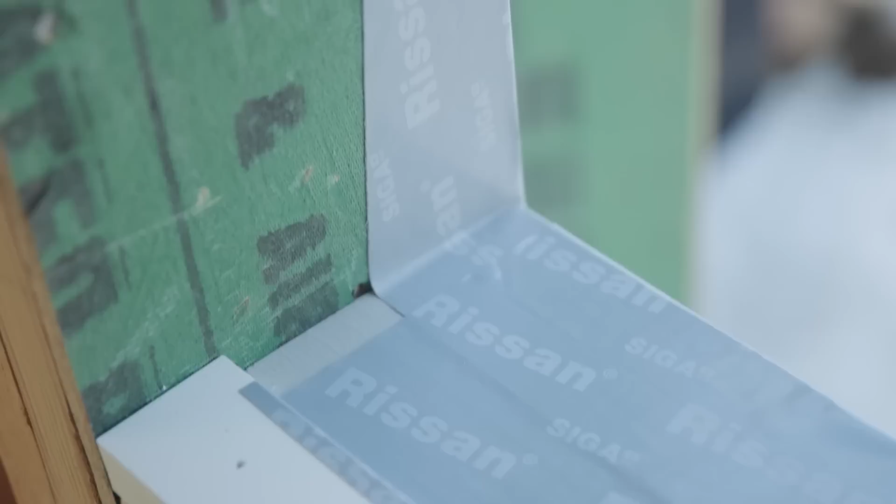Hey, so we're back here at the job site. We finished our tour of that factory. Hopefully you enjoyed that. Those windows went on a pallet, went on a truck, and guess what? You guessed it. The truck is here on site. Our windows are here. We're gonna get this thing pulled up. We're gonna get organized, and we're gonna get those windows offloaded, and we're gonna put in some windows today, so stay tuned.

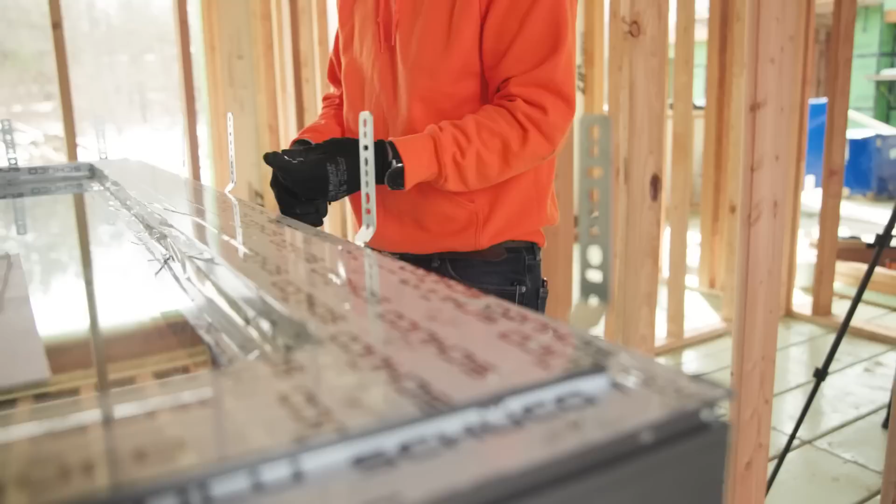Hey, so here we are, part 2 of the window install. And I know we're gonna get to installing windows shortly, but if you remember in part 1, we prepped the window opening. We prepped it using stretch tape and the Zip family of products that are part of the Zip system. But I wanted to show you an alternative here before we get too involved in actually lifting a window up and putting it in place.

So what I hold here is, these are some pre-manufactured flashing corners. They're by our good friends at SIGA, and I'll dry fit this one. You'll see it basically is made to fit right in the corner there. It comes with a dual release tape on both sides, and you can see I had one installed here, but we're going to install this one here right before your very eyes. So yeah, we'll get the architect, get myself in trouble here by

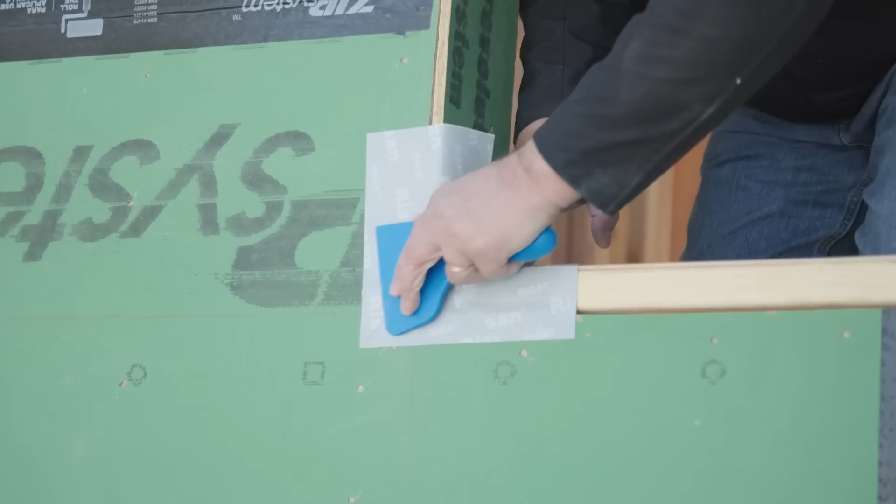trying to play carpenter. So I just got this handy dandy flashing tool, and let's see here. See if you go down the seam and then flash that out, and then I can come back, work out all the kinks there, then fold the inside. Like I said, it's a dual release tape, which means basically 2 parts, so it's not one backing. And like we did the other one, we'll stick the tool in here, and we'll get that corner set, and then work our way out of the corner in both directions.

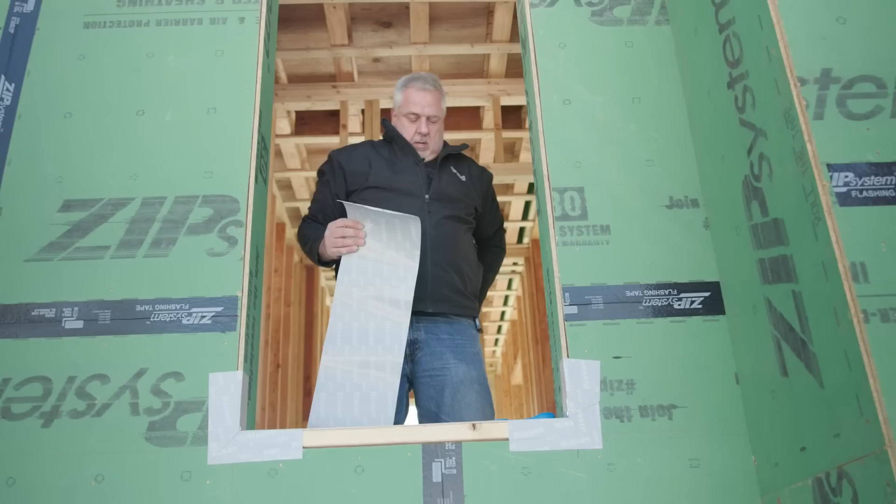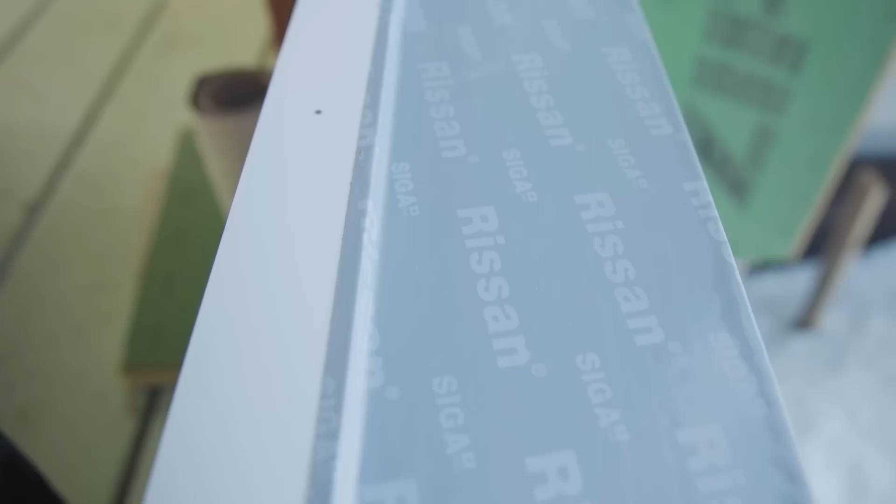All right, so you can see we have both of our corners properly flashed there, and we'll set this middle piece. This is their larger flashing tape, and it also is a dual release, so we'll pull that one section apart, and then the goal here is I want to just bite the top of my back dam, have it come down, go across the slope sill, and basically make an attachment that bridges from my weather resistant barrier there to the top of my back dam. So we will just barely bite that.

The problem with aggressive tapes is they're aggressive. But there we go. So take that, barely bite, handy dandy tool, and just tuck that down inside that back dam. I like this tool because it's got a nice blunt edge, tapered edge there that we can get right inside and then work this stuff out. Yeah, you get a little bit of forgiveness, but not a whole lot. We're spending half the video me pulling the tape off. So we'll take that, fold that down. Remember our goal, connect the back dam down the face of our slope sill.

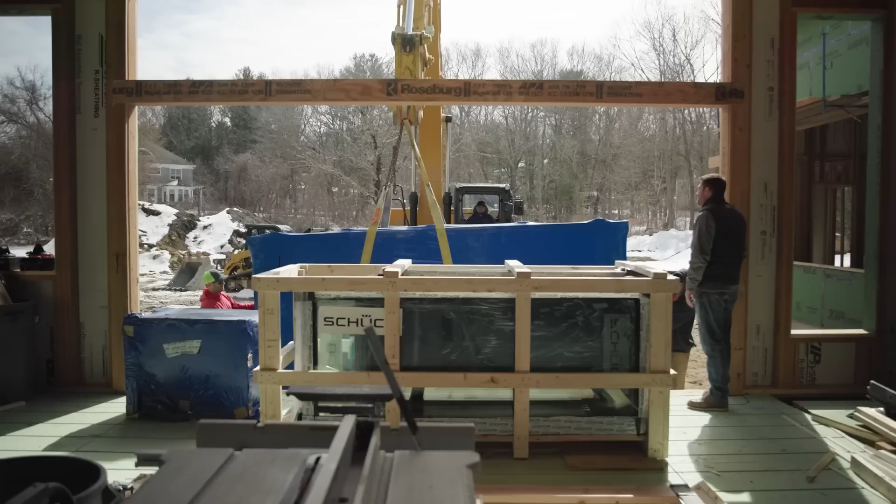Across there. Yeah, and there you have it. A nice flashed corner where we used the SIGA pre-manufactured corners. We drop in our pan flashing there, and of course we'll finish this off by bringing our flashing down the side here, turning it in, and coming over the top of that. So anyways, just an alternative. Let's jump on over, and windows are here. You saw the truck. Let's start installing some windows.

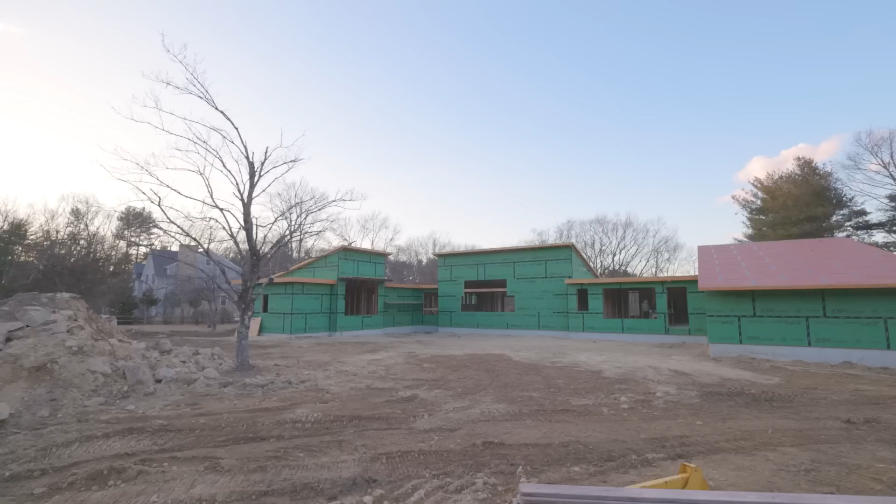It is window install day. Yeah, we're done looking at those rough openings. Schüco truck arrived. You saw that coming in. And here we have our Schüco windows. Not only do we get the windows, but we get a design tech from Schüco. Armando, welcome Armando to Build Show Build Boston here.

And Armando is here to make sure I don't screw up, right? Yeah. That's why they sent you. Make sure Steve doesn't do anything stupid with our windows.

So you can see here, windows come very well packaged. We peeled the plastic off. You can see that they're fully protected when they arrive, and those are still in a protected truck. So they come out, we have the crate, break down the crate. All the windows are individually wrapped. A little bit about the performance of the windows, Armando. So the U value on these windows, it varies, right? Yeah, it varies when you have a bigger system, or whether it's a fixed or operable.

So it varies, the bigger the glass and all that, so it changes, yeah. Yeah, so basically the glass is the better part of the window unit, right? Yeah. And for those of you that aren't familiar with the lingo of windows, we basically have the IGU, which stands for insulated glazing unit. That's the actual glass component of the window.

In a fixed window, we just have the IGU in the frame, but if we have an operable window, the secondary frame that is the carriage of the glass is called the sash. Yep. And we have a lot of tilt-turn windows here, but as you were talking about, Armando, the size of the window matters to the performance. The frame is the worst part of the window, and the glass is the better part of the window.

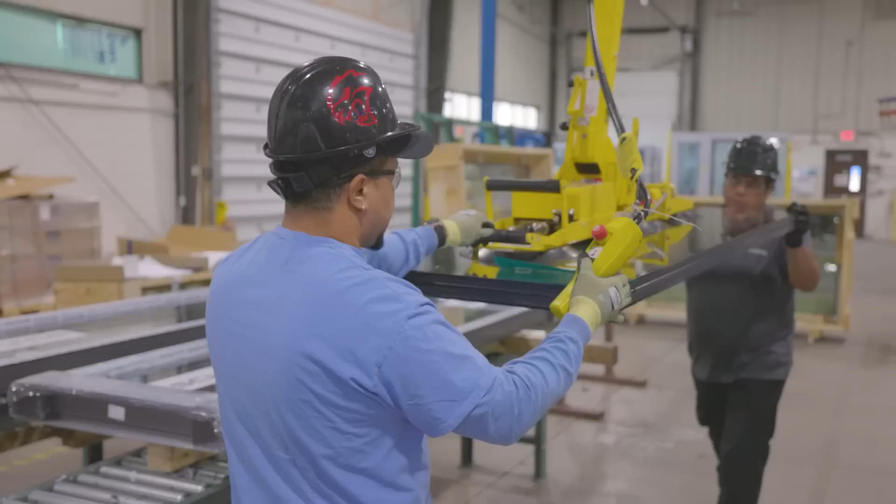I want to say yes and no. You still have a good value coming through your frame. We've done thermal testing on all these units. And these are obviously all thermally broken. Yep, they're thermally broken. Put an aluminum window in. Yep, and this system is an AWS 90. So it's the biggest of its kind, and the thermal value on it is very, very high. Right. So the frame, the glass, it all balances itself out, and that's what we try to do here.

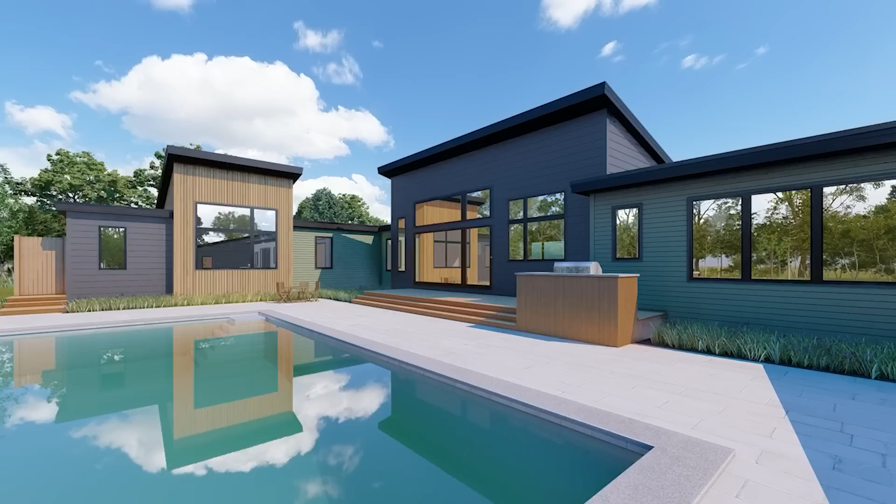Gotcha. And these, for those of you that are taking notes on the U values, these probably range anywhere from 0.13 on our best unit in the house to somewhere around 0.18 maybe on some of the smaller units. Again, through the design work and working with Schüco, I'm trying to maximize the size of some of these windows because the glass is the better portion.

Plus, we're trying to capture the view. So we're taking advantage of building those larger window units to capitalize on the view, the amount of glass, the efficiency of it, and just deliver the best possible project we can to our clients. So, Armando, we should head over there. We're going to break down one of the windows. Armando's going to go through all of the details that he brings from the factory and the design tech side, and we're going to talk about how we prep all these windows and get ready to put it in that rough opening. So let's head over to the table.

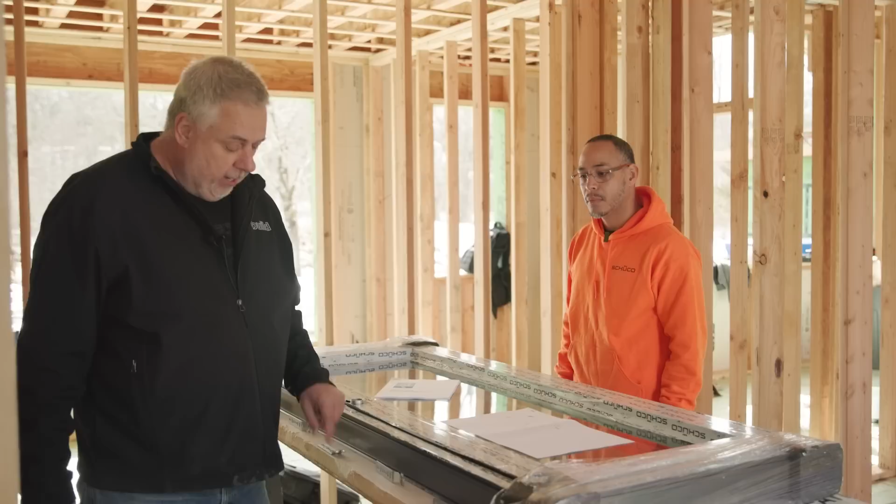We made our way over here. We have a nice little table we made up. Just wanted to point it out, we have a piece of rigid foam that we set the window on. We didn't set it on the sawhorses. You don't know if there's a nail or a staple or anything there. We don't want to put our good aluminum frames up against the substrate there where we're at the risk of scratching it. So we got this up.

First thing to notice there, Armando, is you guys do a hell of a job. Everything is very well protected here. Yes, it is. Right? I mean, you pull it out of the crate and then there's just a whole other level of protection here. Obviously we have the foam on the corners there, top and bottom. We've already verified that, yes, this is in fact the bottom of the window.

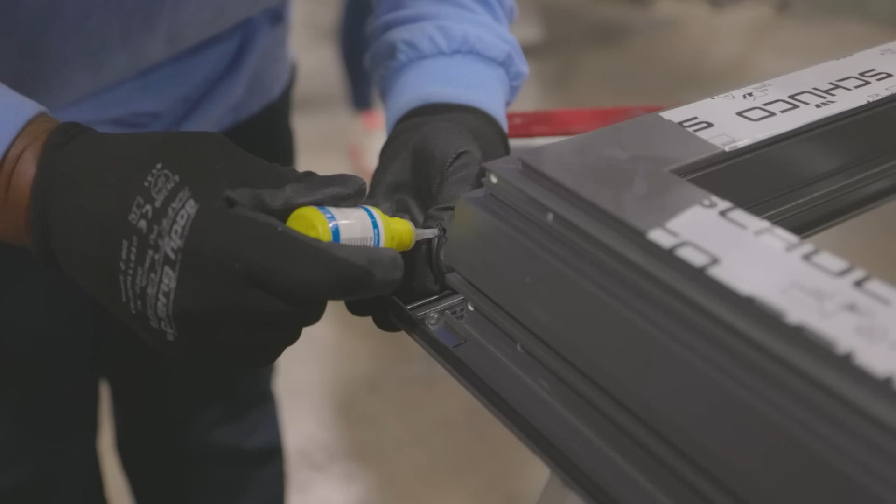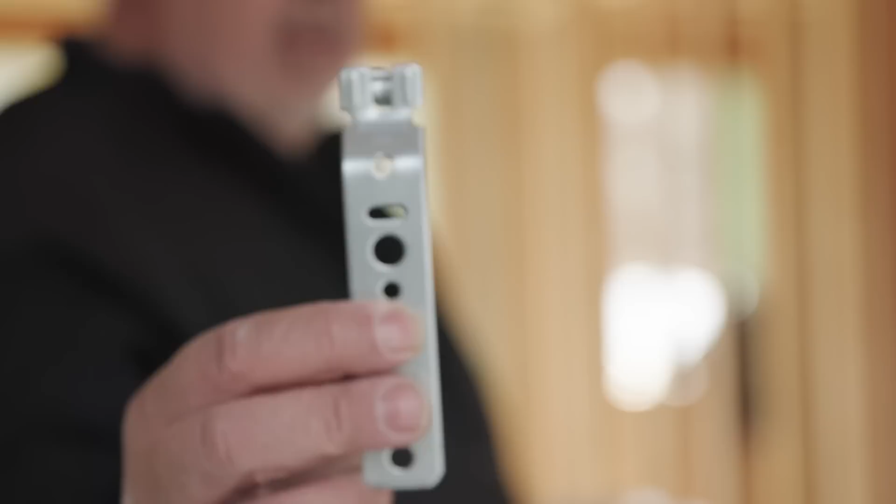So one of the cool things about working with Schüco windows, and you saw it in the factory, is that pretty much all the screws, hardware, everything's proprietary. Well, the same with the clamps. You can see it has the Schüco name stamped right on it, and so it's basically the Schüco stamp of approval. Now, Armando, you pointed out a really significant aspect of these clips. You want to run that by us again?

So the clip is made so that you only rotate it clockwise and not counter. And the reason for that is so that it'll gain grip once it gets into position. So once you have it sitting at an angle 90 from your frame, it'll have the strength. It'll be at its tightest bite. Yep. So let me bring this back over. You can see here that the actual teeth there are angled. So as it gets rotated, it actually draws the clamp in, and it's at its tightest, like Armando said, when it's 90 degrees.

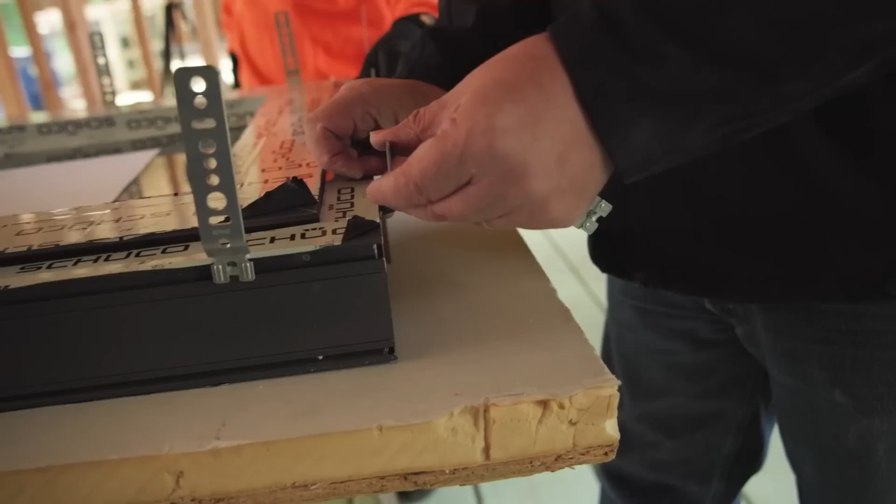Now, installing these, I will say Armando is prepared. He came up. We have a window schematic of the window that we're installing here, and he has all the clamps laid out. I see we called for 6 down the side and then 4 at the top and bottom.

Are there any rules of thumb that we should be concerned with, like how far these come out of the corner or placement? So we actually had a third-party engineering team that came up with a schematic as far as how many strap anchors and how far apart, based on the PSF of certain systems, like if you need it for higher wind loads. So all that came down to it, and I took the schematics from that and I applied it into this, so that way we can actually.

So this third-party engineering company, they didn't engineer it just for us, they engineered it for Schüco. So if I was to say put these windows in Miami, because of the wind load there, or on the coast even here, these clips, instead of 6 down this side, it might in fact be 7 or 8 of them. Yep. So that we're getting a stronger bite there, right? Yeah. And I know you told me that typically the first one goes in about 4 inches on each side of the corner.

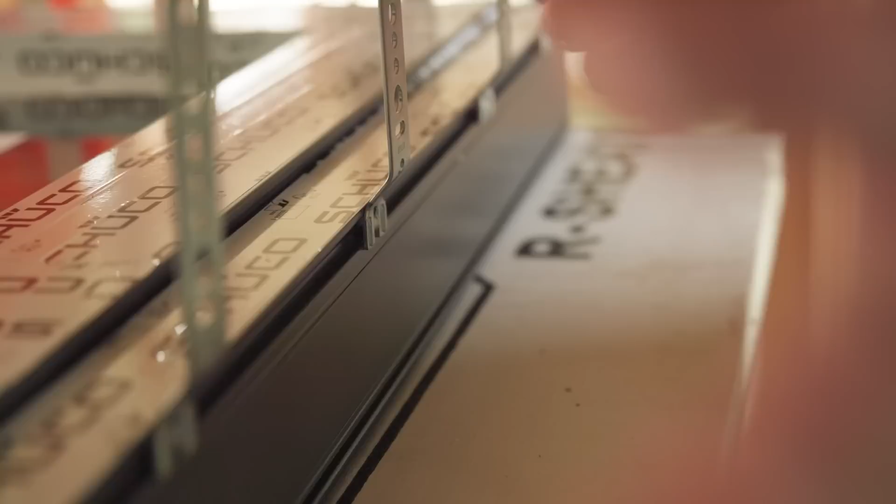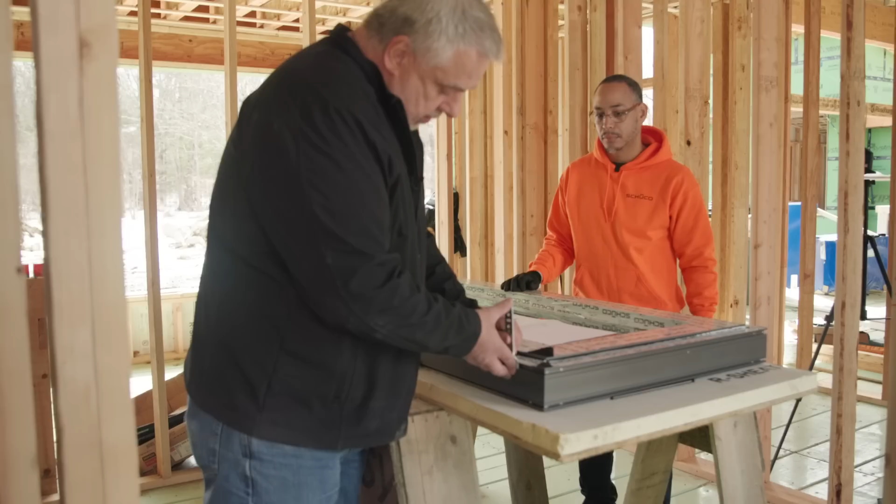Yep. And again, clockwise, so here we go. First one goes in, we rotate it, and you can feel that get drawn in, and that's it, right? Yeah, I mean, that's pretty much it. Not a whole lot of magic.

One of the beauties also, for those of you that don't have Armando showing up on your job site, we have an extensive installation guide here by Schüco that goes step by step for every aspect of the installation of these windows. So we'll wrap up, we'll get the rest of these clamps ready, we'll get the window prepped, and in the rough opening she goes.

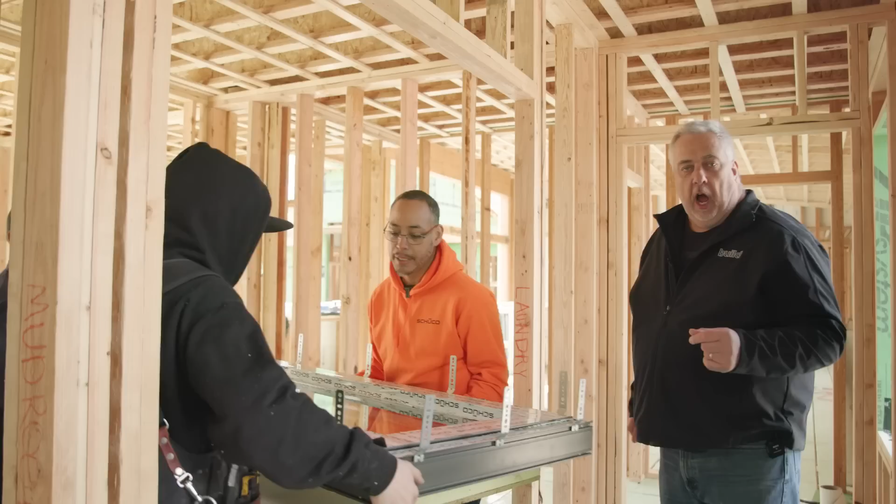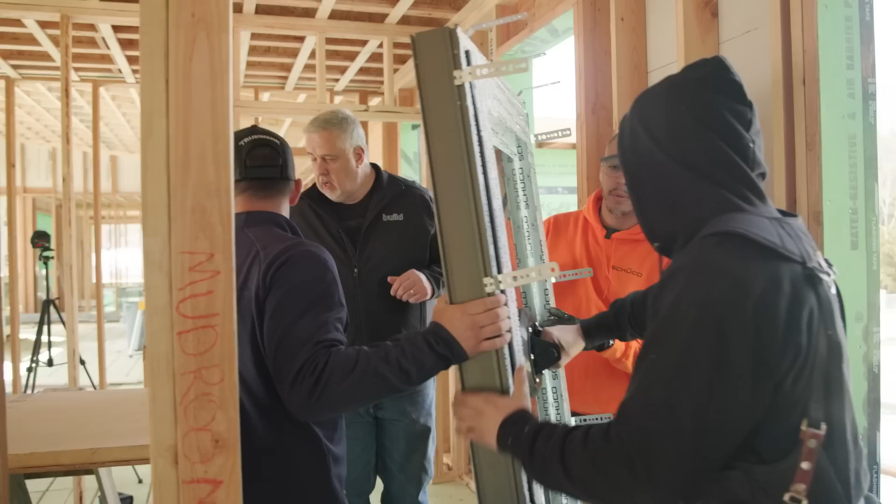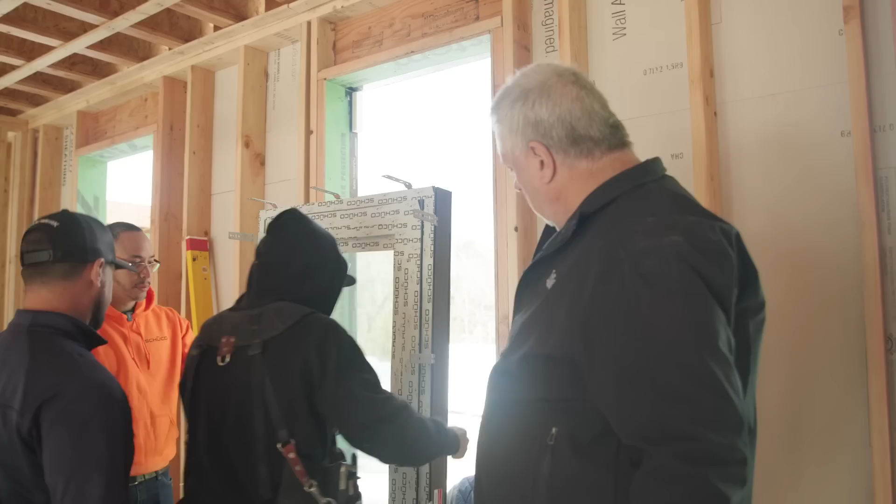All right, so we got the window clips all set. We're standing the window up. We're gonna throw it in the opening. Notice in the opening that we have a series of blocks that have been installed. Let's see if I can sneak through here. Excuse me, buddy. But you can see the block up at the top there. We have a mirrored one block here, and then we have 2 at the bottom. 2 things are happening with those blocks.

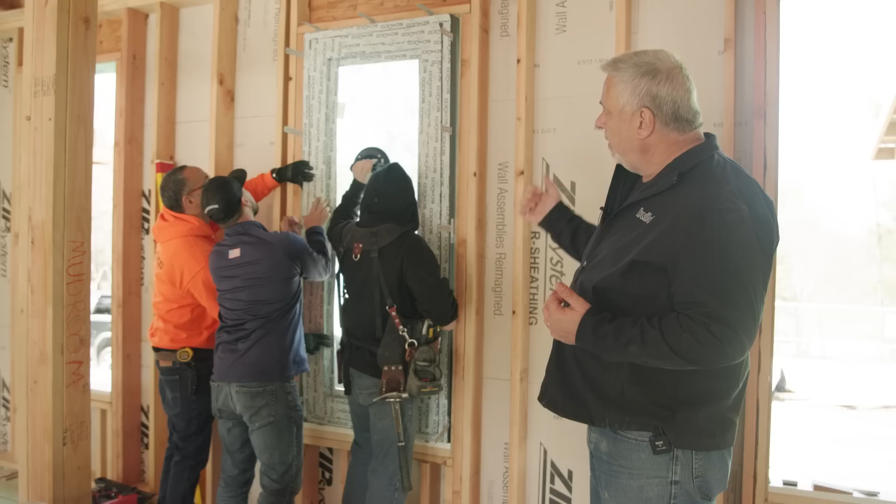One, they've been plumbed up by the carpenter to make sure that if we put the window up against them, the window is then plumbed. We'll still check the inside with a level. But the other thing is, windows are not the cheapest part of the house, and the last thing you want to do is lift it, put it in the opening, go to tilt it in, and the window falls out of the opening and ends up down on the ground. So those little stopping blocks not only preset the displacement of the window in the opening, but they also help keep the window from falling out of the opening. So let's get this window in, and then we'll show you the attachment sequence.

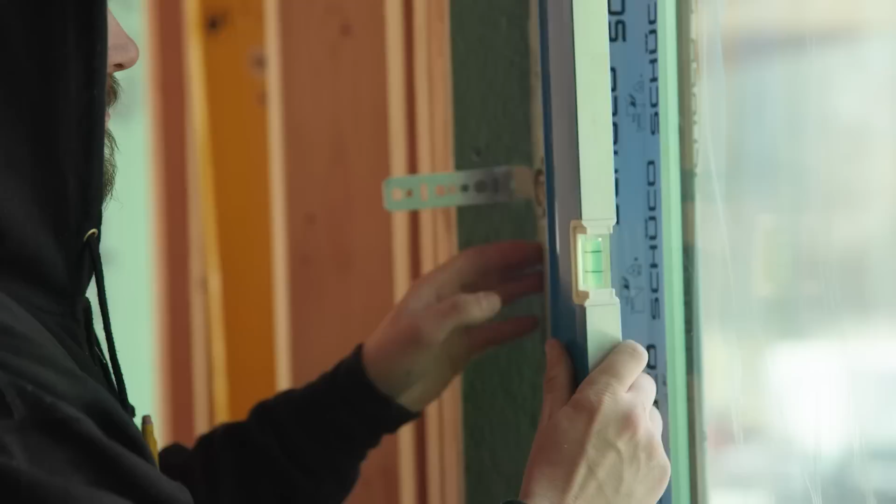All right, so you can see we got the window in. Christian's got it all screwed off. All of our clamps here, you can see they're screwed off. Now they're standing proud of the frame. Sometimes you could just bend those over with a hammer, but I like to have the guys come and grind those off, maybe about an 1/8 of an inch inside of the rough opening there.

For those of you not familiar with Euro tilt-turn windows, we have our tilt-turn window here. Obviously the handle is in the down position, that's the lock position. If I turn it 90 degrees, you can see that is the turn version of the tilt-turn window. That gives us the full ability to clean the window. Consequently, you don't open the window to vent like this. It is merely just to clean the window. If you're venting the space, then you rotate it another 90 degrees and you pull the window, and you can see it falls in about 7 inches and it becomes fully venting.

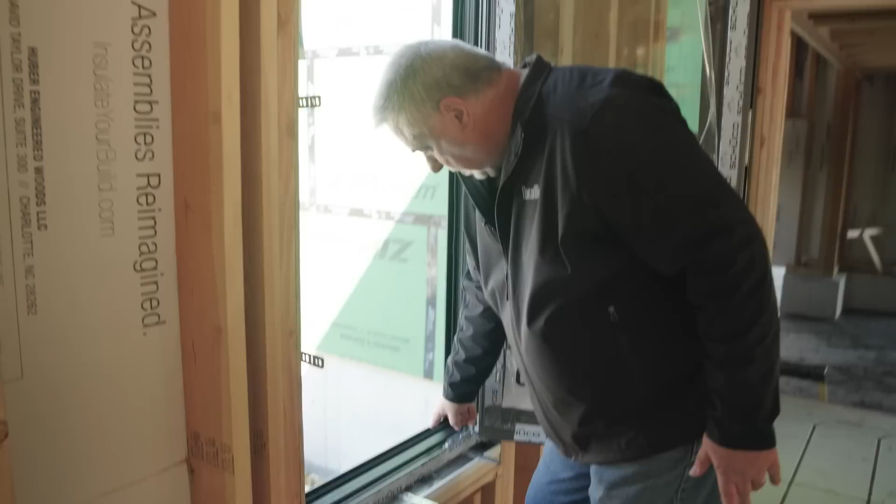The other beauty is that water now is a shedding device into the frame. And when we were out there, we talked about it. It drops down into the frame, and you can see there's some weep holes down there inside that allow the water to go out. So not only are we having a water-managed system of the window in the rough opening, but the window unit itself is water managed. So, all right, the window's in, it's screwed off, we'll get those ground off. Now how do we finish the window? Well, let's talk about that for a second.

Window's in, we just went over the operation of the window. You can see our 1/2 inch space there. That is the unit dimension versus the rough opening. Unit dimension plus 1 inch, we went over that, and that gives us the rough opening.

Now, I talked about it earlier. The zip liner in the rough opening is to bring our weather resistive barrier around the corner. Now, whether you believe it or not, the window is a weather resistive barrier also. Because we cut a hole in there, we replace the sheathing that we cut out with the window. So it's now doing the job of the weather resistive barrier that would have been there if we had not chosen to put a window there. So now we have to make a connection from the window and bridge it to that liner or weather resistive barrier that we fold on the inside.

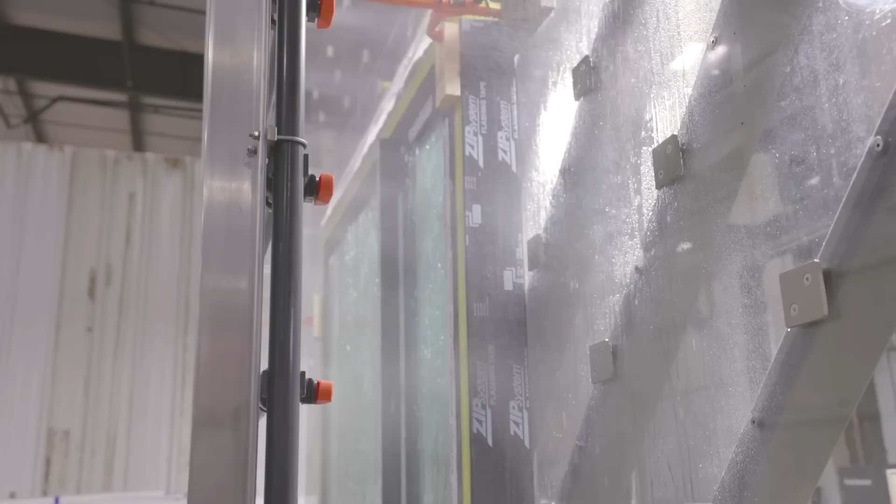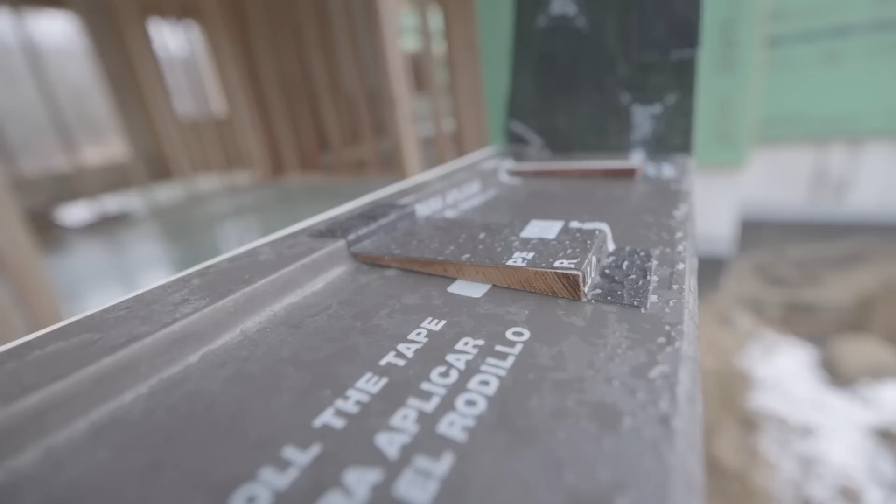Now, 2 things that we need to be concerned of. Number 1 is water. We need to solve for a water managed system. We went through the whole deal here. You saw the video where we built the back dam, prepped the window, have it on blocks, window sitting up on top of those blocks. Water can get out. We want to make sure no water has the ability to get in along the sides and the head of the window, but also air tightness.

Now this house here, we're shooting for what I call passive house inspired. So we're not seeking certification, but we're seeking all the parameters of passive house. So we'd love to get this house into that kind of 0.5 or less air changes per hour at the 50 Pascal mark. So air tightness is very important to us.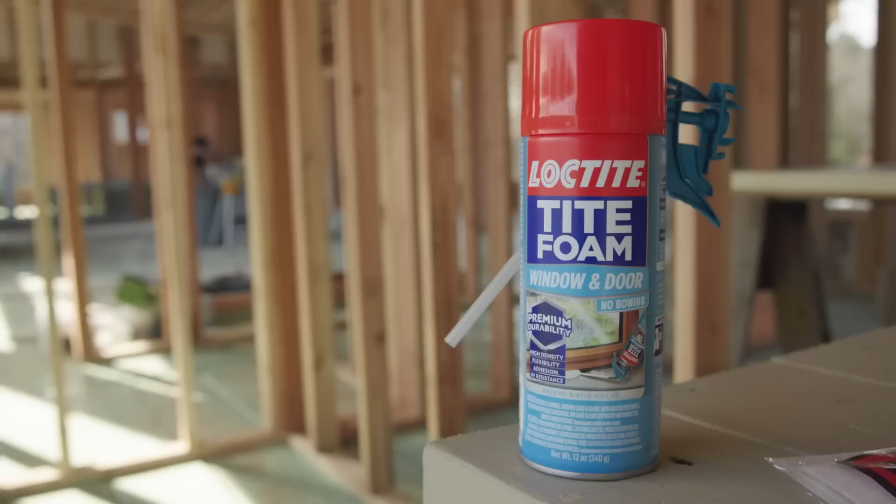So we have a couple things happening at the window here. We have the 1/2 inch space here, but notice up at the top, we're relatively tight and we're relatively tight down here. There's a couple ways of doing this that I favor, and I'm pretty much good with interchanging these 2 different means. The very first and simple one is to just get some minimal expanding foam, and why I call for minimal expanding, it says no bowing basically, is we don't want the foam to apply any pressure and try and move that jamb.

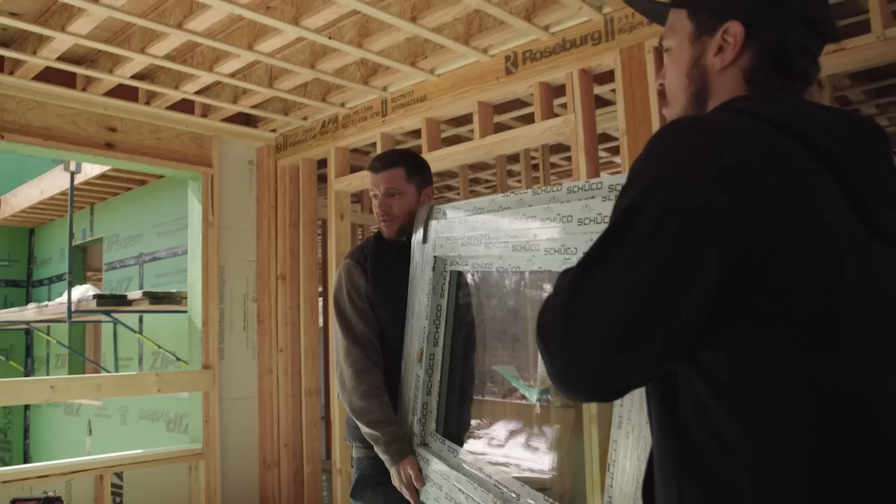Now, for smaller double hung, double glazed windows, the frames there are a little more fragile than the European frames. These are about 3.5 inches square. They're very robust, triple glazed IGU. You're not really going to move those if we use something that wasn't minimal expanding, but I still like to do it. Basically we would just take that foam and spray it along the inside edge here and make the connection from the weather resistant barrier liner to the window itself on the inside. Given that the window's 3.5 inches, we're probably looking at this inside 1/2 inch being filled up with this stuff. The remaining 3 inches there are basically just open to the air on the outside for now.

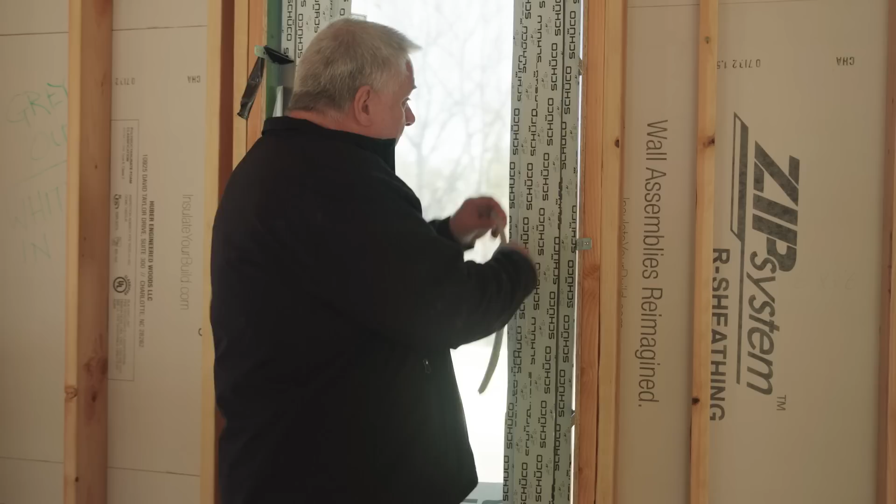The second mode of operation here that I would approve of is to use a backer rod, and our good friends at Sashco using some Big Stretch, which they call Big Stretch because it's made for big cracks. But for that, we would basically just simply tuck in that backer rod. And you can see, it fits in there nice and neat. Now, that's a 1/2 inch hole. We're using a 3/4 inch backer rod so that it fits in there nice and snug.

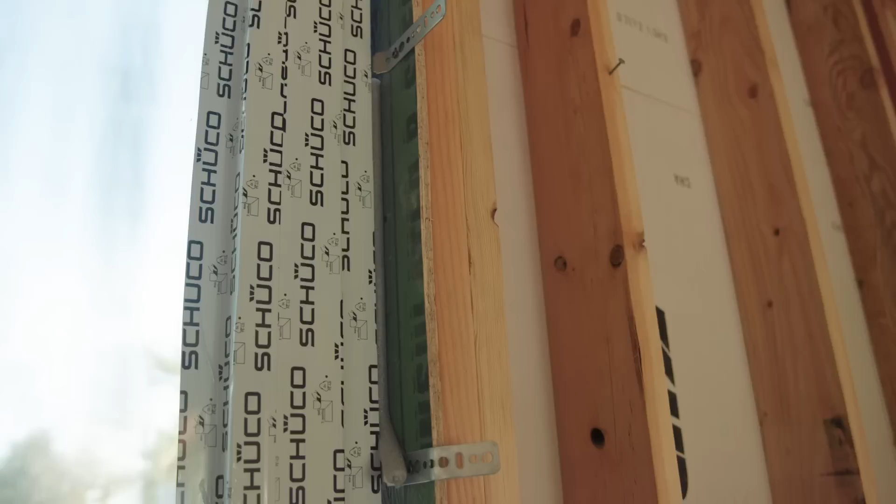And then we would take that caulk and caulk that joint. Now, the beauty of the caulking is when we turn the corner, that joint is small enough where we can get away with just using the sealant there and not have to introduce any backer rod. As a rule of thumb, if this starts getting past maybe about 1/4 inch, the sealant doesn't want to stand alone. So you want to get that backer rod in there to reinforce it. Now, those are the two ways to seal the side or jamb of the window to that weather resistive liner.

There's still one last step. The very last step, we turn to our friends at SIGA. So we have 2 different rolls of tape here, 2 different sizes on those rolls. On the inside, we use their Fentrim IS-20 tape, and the IS-20 tape is an impermeable tape. We don't want any moisture that gets in there to have the ability to dry this way.

We want to force the drying to go to the outside. Now, the beauty of Siga tapes is they're dual release. So there's actually a flange here that you attach to the window, and then you can see that it comes off. So it's already pre-folded and all set up. I took the minute here to pre-install a piece so you can see it here.

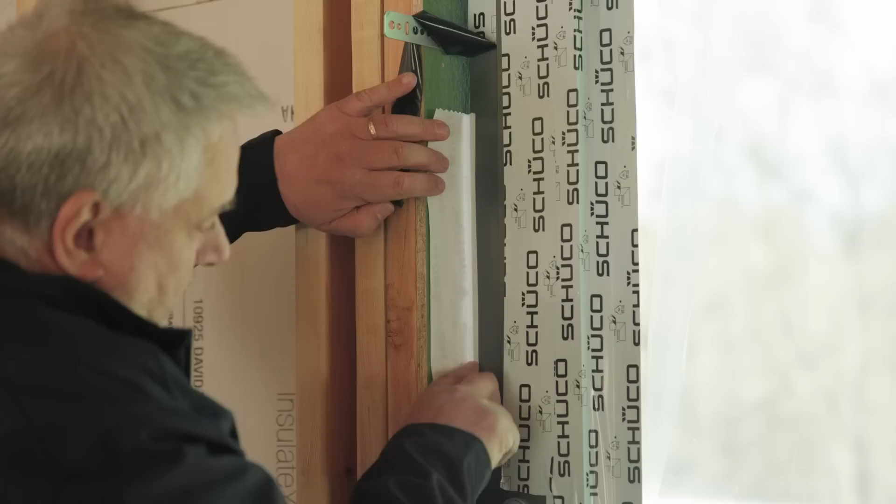The flange, we just want to bite the window about, you know, maybe a little over an eighth, 3/16 or so, and then basically fold it up, and we would just take off that piece and then simply attach it to the inside. Now, from an air tightness perspective, we would do this across the sill, up the jambs, and across the head so that all 4 sides would have that continuous air barrier there.

Now, one of Siga's logos is their job to seal up the world, right? So they're specialists in air barrier connectivity and air barrier technology with their Siga Majrex and their Rissan tape. But that 2-part release and having it pre-folded, you can see that it's already set up for that 1/2 inch dimension damn near perfectly there. So we would run that around.

Now we have our fully water managed system inside. We have our belt of either spray foam, the expanding foam, and or the backer rod with caulking, or just caulking if the joint is too tight. And then we'll finish off the whole system by enclosing it in this IS-20 Fentrim tape on the inside.

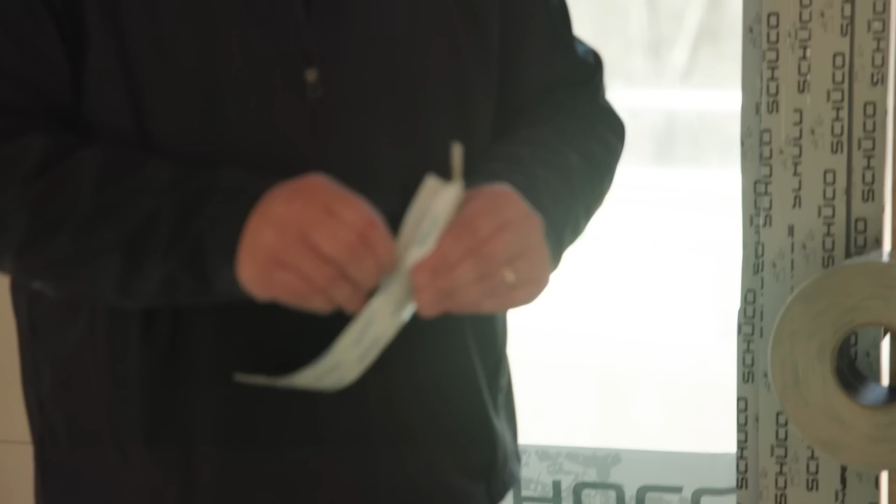As we move to the outside, we would then move to their other Fentrim tape. This is their 230. This one's gray, not white. And it is also a similar kind of tape. So it has that one section where it can be attached to the window, and you can see this is also dual release on the sides. So just like the inside, we would run that up the jambs and across the head. Notice that I made no mention of putting this tape down at the bottom.

So on the outside, it helps to create somewhat of a tortured path, but it's really not an air barrier for me out there. Although, if you wanted to do this as a barrier system, this is a permeable tape, so we could very well put it on and do all 4 sides. I choose not to. I like to have the water managed system. I like to manage the air on the inside of the window.

I place this down the jamb of the window all the way to the bottom of the window frame and across the top, so the top piece obviously overlapping it. So think of it as flashing. So the only place that air could get in is through the bottom of the window at the bottom of the sill. But with all of the action we're taking on the inside, I'm confident that we're going to get to our air tightness number anyway. So I'm not really worried about that. But that's how we finish off the install of the windows there.

Hopefully that answers all of your questions. We got these beautiful windows in. That's one of about, I think, 38 windows here. We got some monsters going in, so next time we come out here, we're going to have windows in and we're going to be closed in. So until next time.

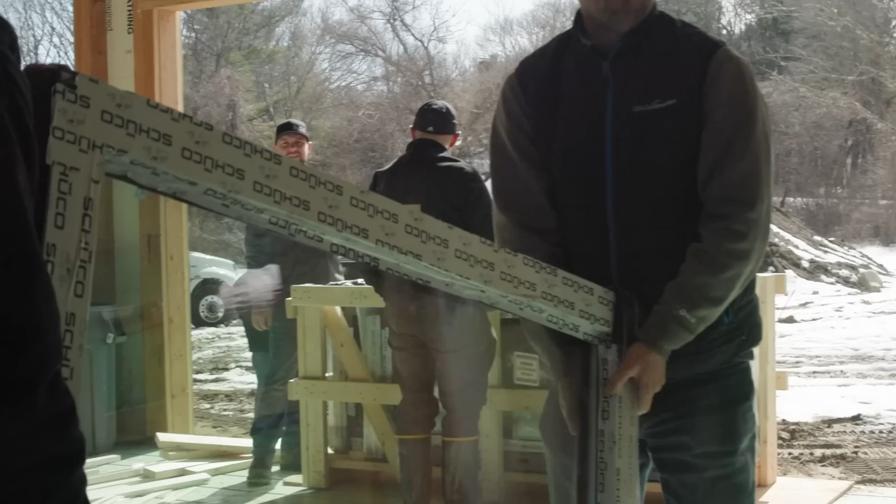All right, so I got my good friend Big Red in hand. I got some details down here, so you can see we grabbed the jamb first. So I just want to talk about prepping that rough opening. I know we talked about that in the last video, but it's so important to get that basic concept down that I thought I'd throw up the jamb detail here, and then we'll dive into the sill detail, which is what you saw happening out there, installing the windows. So anyways, let's look at this.

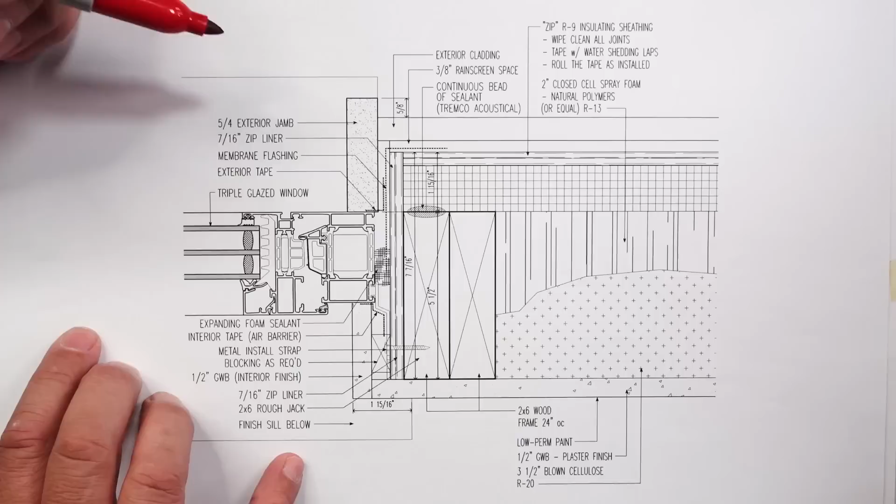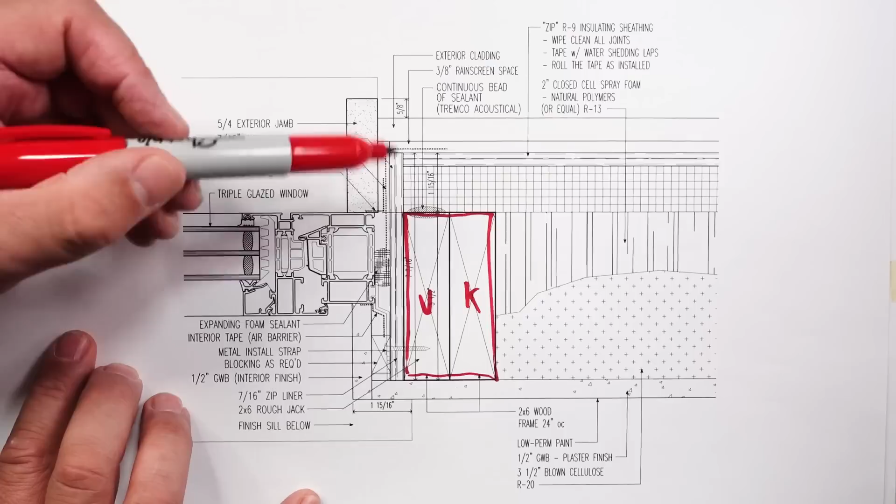So here you can see this is our king and our jack, and I'll label them appropriately, king and jack. King goes all the way up, jack goes up to the header. They form the rough opening. Now remember, we made the rough opening a little bit larger. You can see here we added a 7/16 inch, I call it a jamb liner, right? And that is Zip there.

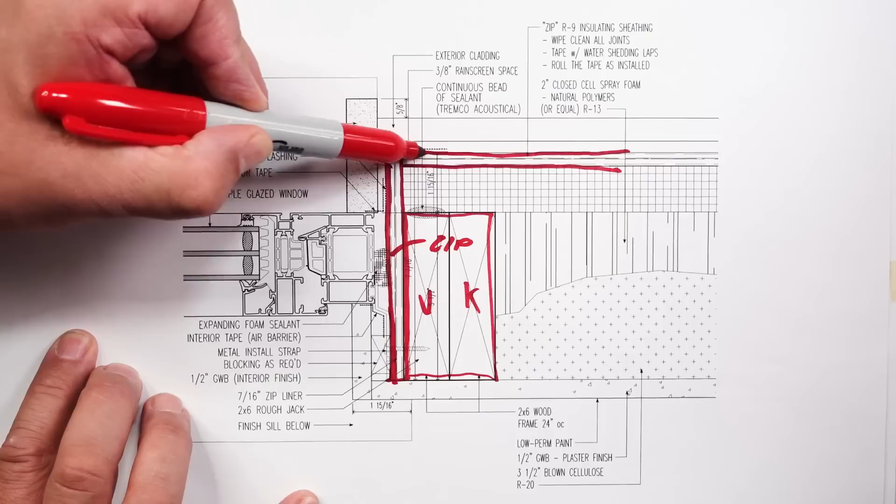And the whole purpose of that is we had Zip R9 on the outside here. And you can see we have all the rigid insulation happening there. But the minute we cut this section out of the wall to put the window in, then we need to maintain that level of continuity there.

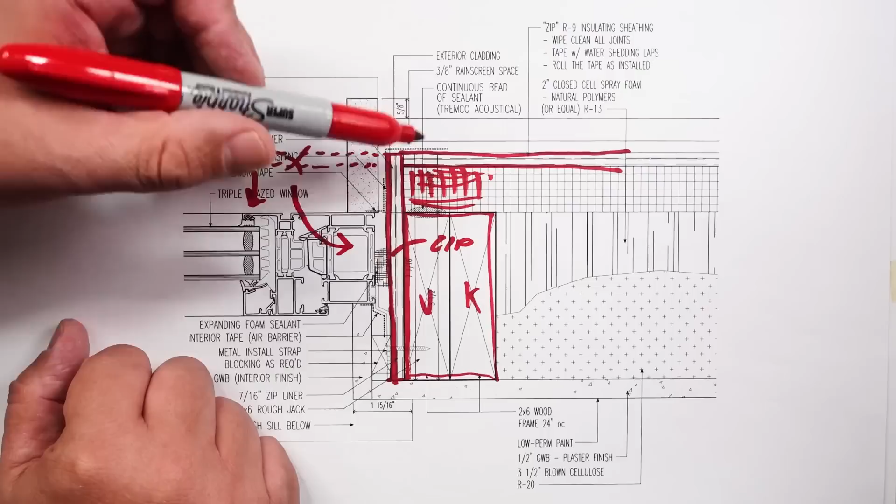So by taking out that section of ZIP, we basically fold our weather resistive barrier around the corner. So if I color this in, that's probably the easiest way to understand the continuity of it, right? So you can see now our weather resistive barrier turns in, and our window, believe it or not, is also part of our WRB system, right?

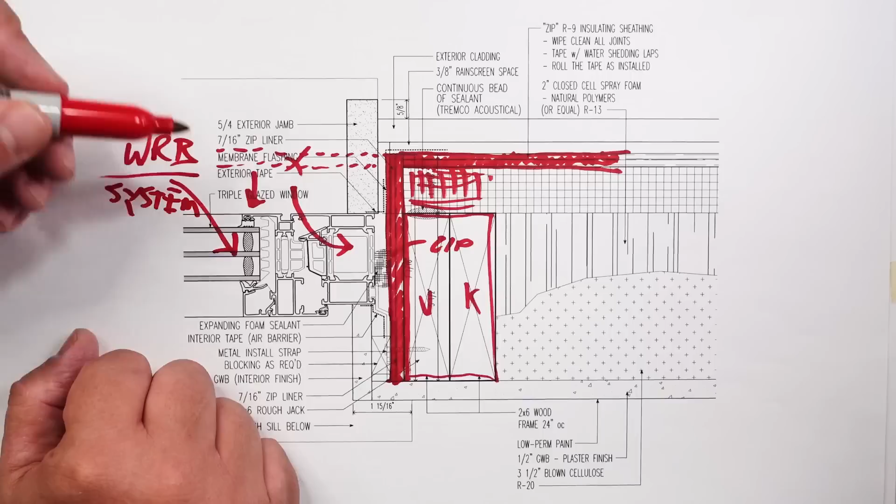All building assemblies are systems, right? They're not components, they're systems. So pay attention to that. Everybody always thinks that the air barrier or the weather resistive barrier is one component. It isn't. It's the windows, it's some sealant, it's some foam, some tape, etc.

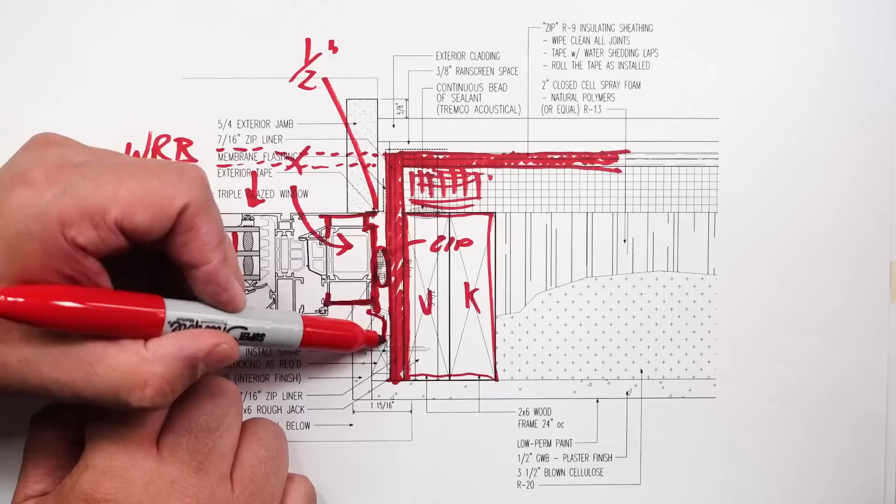But anyways, you can see the window frame basically finishes right there. That's the outer edge of the window frame. So we basically have that 1/2 inch in there that you can see. We filled that in with some foam sealant, and then we'll have that interior tape that we talked about there. So we get kind of a belt and suspenders approach to our air barrier in there with that foam sealant and tape.

But understand, our weather resistive barrier got folded in on all 4 sides: the sill, the jambs, and the head of the window opening. The window gets inserted, but the window falls short by roughly that 1/2 inch, and then we have to solve for that. So just wanted to get that.

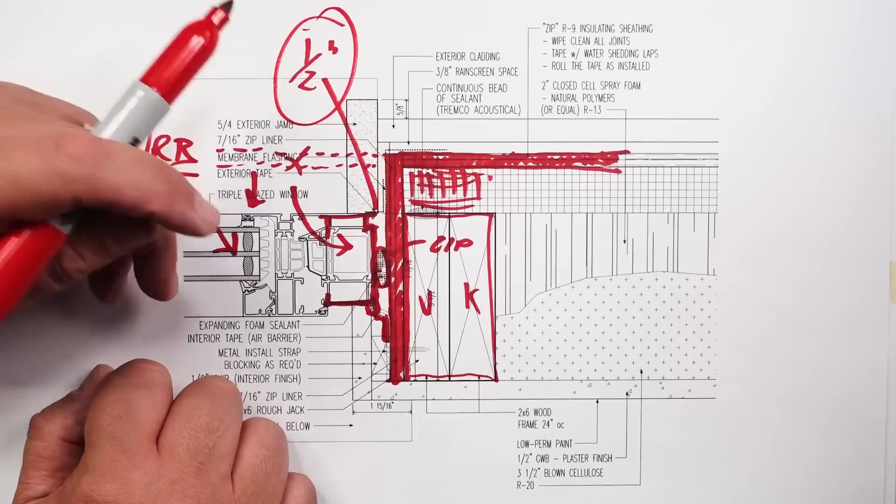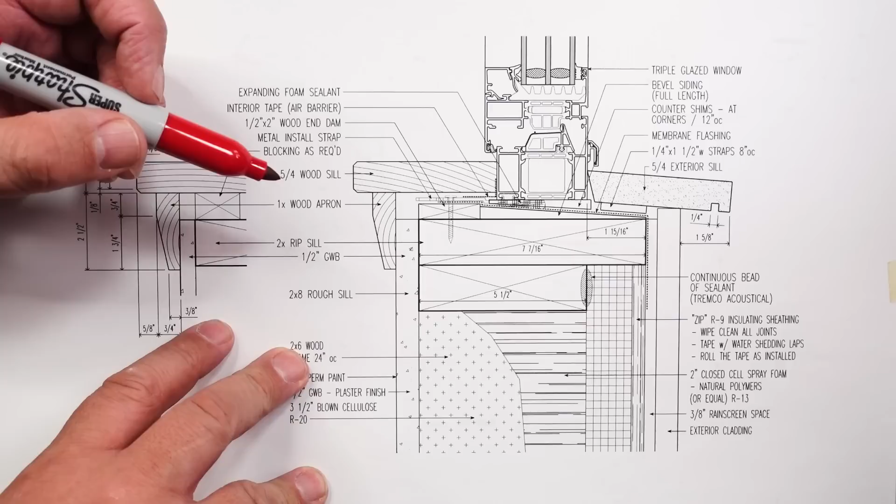So let's jump. I'm going to grab the sill detail here. This is the one that everybody always seems to like. Jamb details are cool, head details, I give them more credit than most people, but everybody loves a great sill detail. So you can see here, this is what I would consider our rough frame sill, right? So we'll just call that RFS, rough frame sill. That's the one that's part of the 2x6 wood frame enclosure.

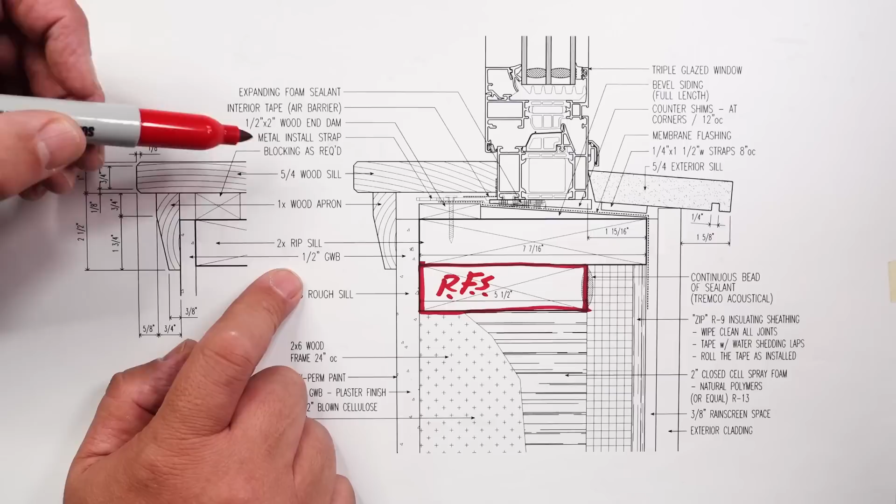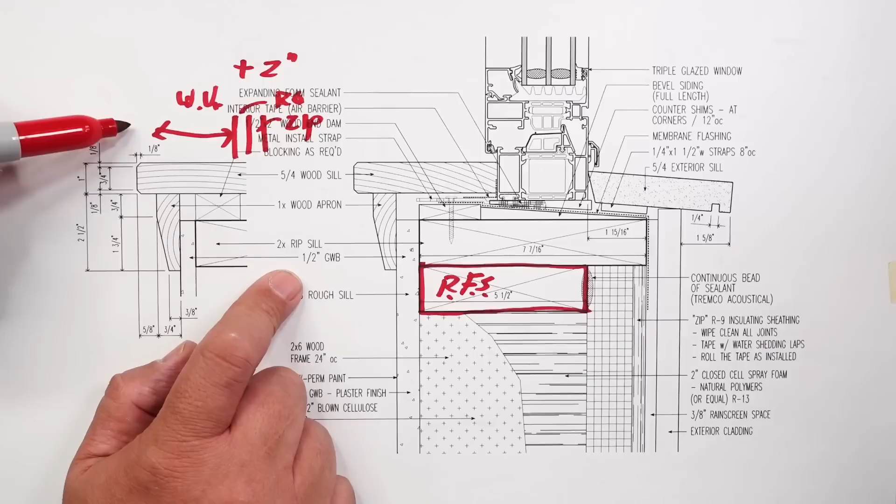Now, on the jambs, remember, we did our window unit dimension, and we added 2 inches, right? So there was a 1/2 inch for the RO, and then there was roughly a 1/2 inch for the ZIP, and that was on both sides. So we had the 1/2 inch here and here. Both of those are 1/2 inch. So 1, 2, 3, 4 half inches, 2 inches. Yes, I can do math.

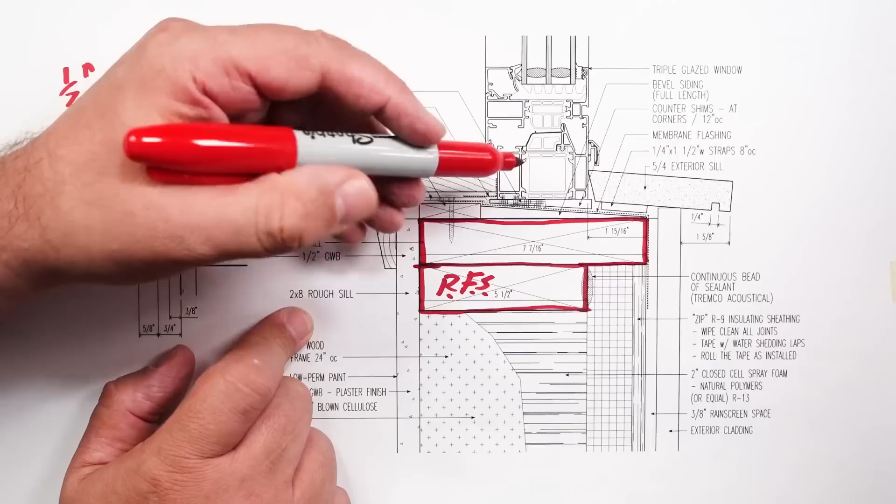But the vertical is slightly different. We have the rough frame here. We actually put in what I call a rip sill. In this case here, it just turned out to be a 2x8. But we'll call it the rip sill, because sometimes, depending on what that wall dimension is, that rip sill will get cut to a very specific dimension. It might not be 7 1/4, it might be 7 1/8 or 6 15/16, depending on what's driving it out here.

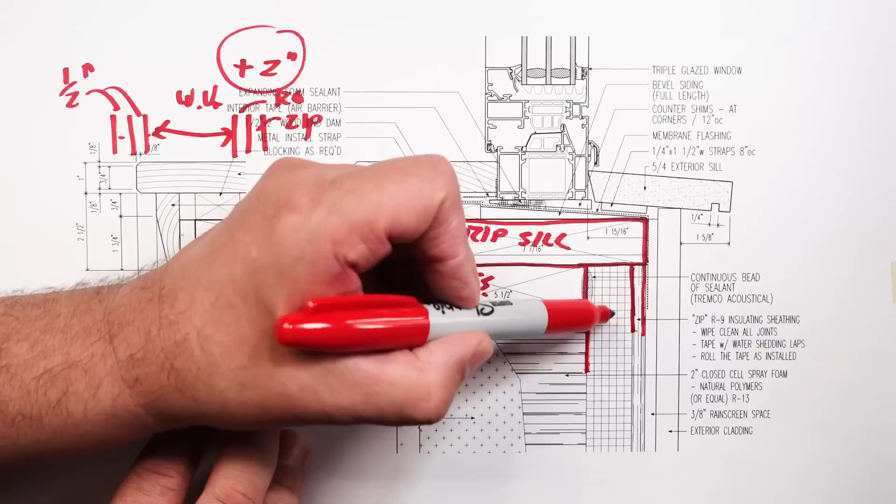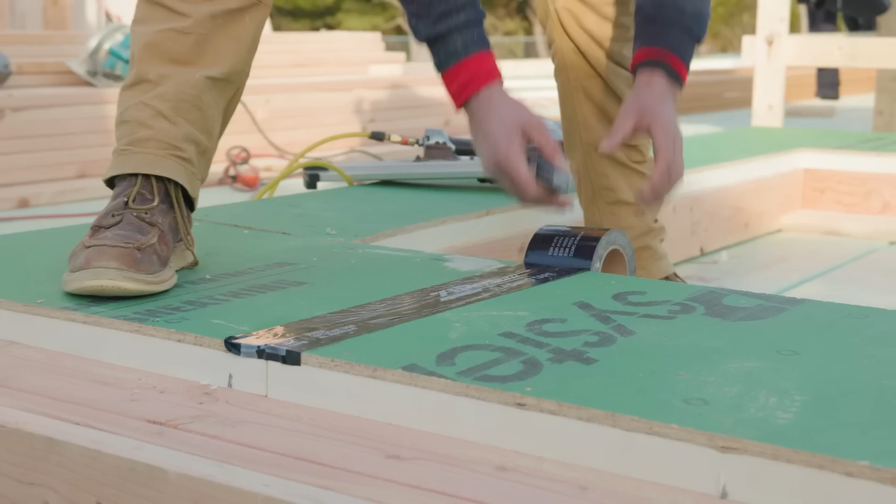But the important thing is to understand, you can see our ZIP R9 is out here. Here's our 7/16 ZIP right there, and then our 1.5 here of polyisocyanurate. So ZIP R sheathing, if you're not familiar with it, go check it out. I did some videos when we were talking about wall framing and broke down the sheathing that we were using on here. But the idea of the rip sill is that we go out over that, so it closes the fragile edge of that polyisocyanurate, as well as it gives me 1.5 here to finish siding, rain screen, all of those things.

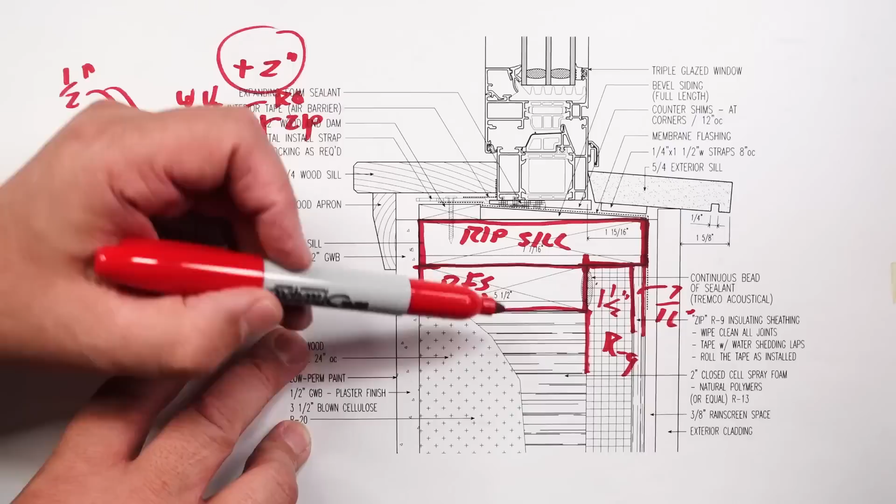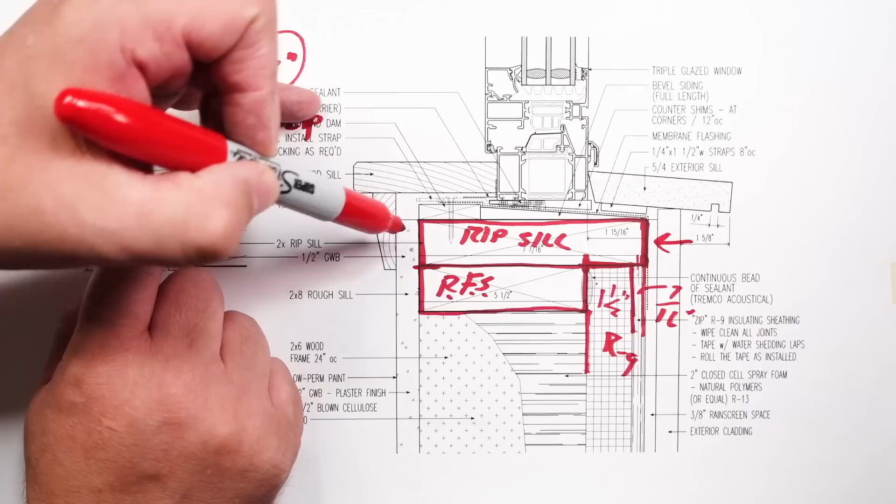If we just finished it here, we'd only have that 7/16 to nail in that way and 7/16 to nail in that way. It's really not substantial. Now, this is a point where building science nerds will combat me, and we'll have a, we'll call it heated discussion, but they're going to call this a giant thermal bridge, right? Which undeniably it is. I mean, heat transfer goes right through that.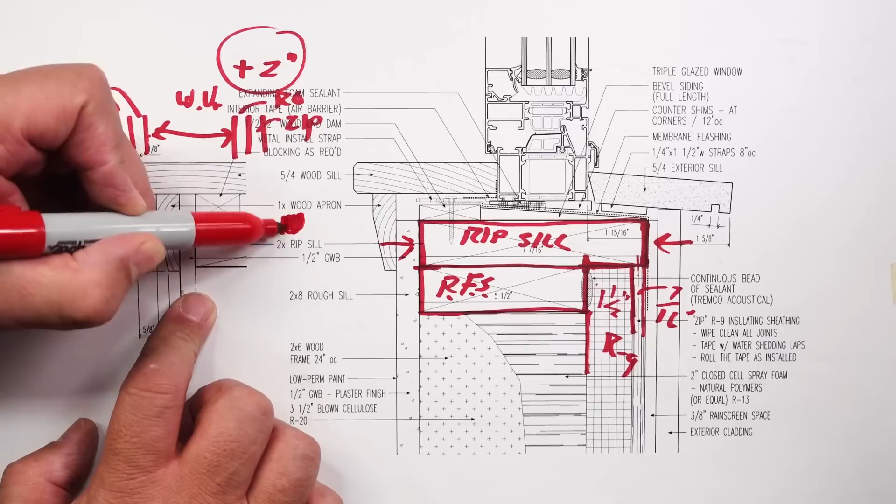At 7 1/4 inches inside to outside, it is probably at best maybe R10, something like that. Nah, it's probably not even that. It's probably more like R8. I'll give it R8. And you can see the insulating sheathing doesn't go up there.

But those that have been around me long enough know that one of my common sayings is, if it doesn't last, it doesn't matter, right? We need to build very efficient buildings. We need to make the right choices. We need to pay attention to water management, air leakage, all of those things. But the number one concern that I have, and that was instilled in me as a young architect, is durability.

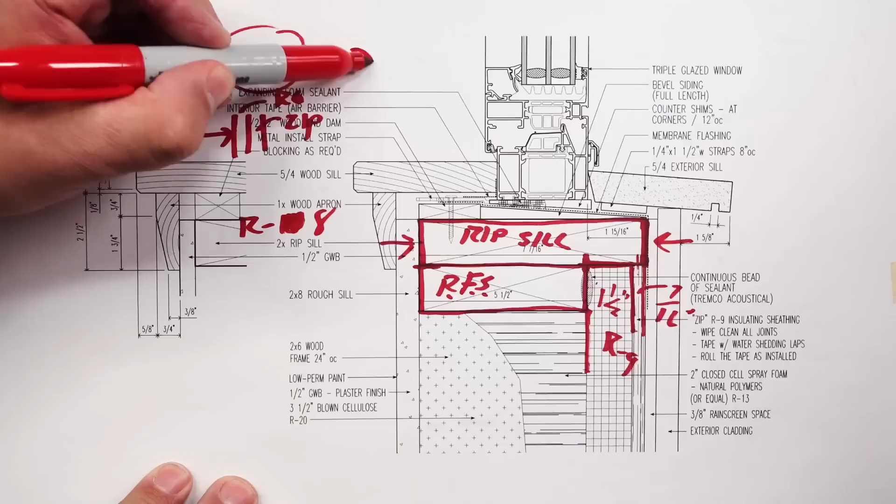Right? And say it with me. If it don't last, it don't matter. Right? I can build the most efficient, passive, zero energy, living building challenge house in the world. But if we're throwing it in a dumpster in 10 years or 20 years because it failed because of a water management issue or a structural deficiency or something like that, then what have we really done? We've used up a whole lot of resources and built a very efficient building for a relatively short time.

Me, myself, I would rather build an exceptional building, not outstanding, but exceptional building, and have it last a very, very long time. And in that time, create very little maintenance, if any, to the structure, and try and minimize that as much as I can.

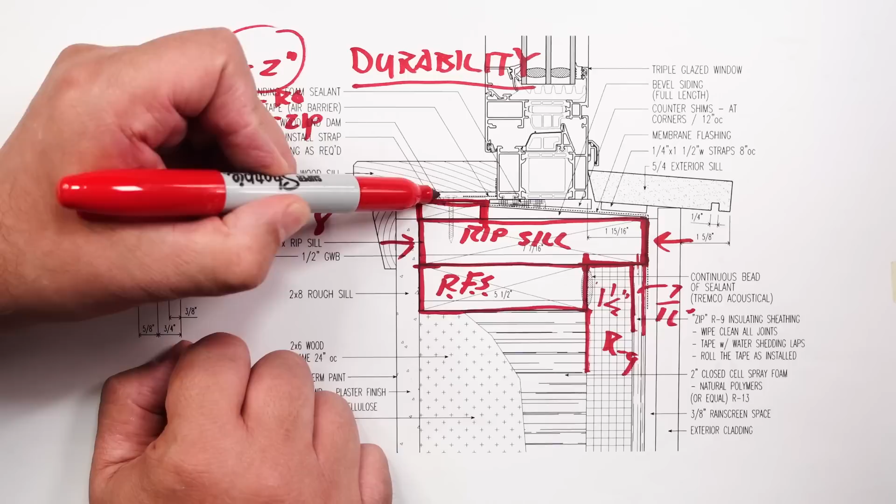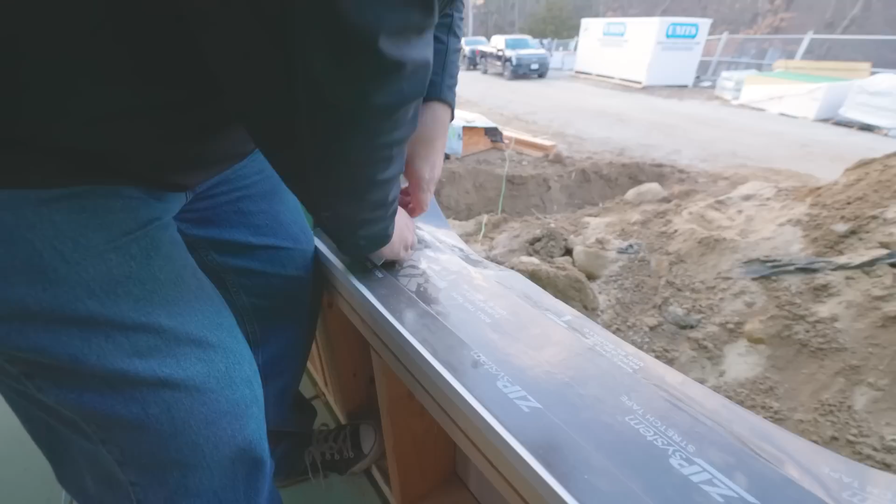So anyways, there's the rip sill. You can see here is that back dam that you saw out there. And then of course we put in our sloped sill. That was our piece of cedar lap siding, and then we came over the top of that with our flashing that extended down, so that basically we've created this sill pan here, and you can see that that sill pan drains into our rain screen, which is right there, right?

So it's going to drain in, and it's going to fall to gravity, and it's going to fall at the bottom of the wall where we have a provision for its exit. Remember, water management, right? The second word of that is not water barrier, it's not water stop, it's not water fighter, whatever word you want to throw out there. It is water management. The whole purpose of what we're doing here is to provide water a path to go should it get in.

And if you don't believe it's going to get in, then let's just leave it at, I think you're being pretty naive about what you're building. So for 30 years, I've been building buildings, and we've been taking apart older buildings. And one of the things I love to do is take apart older buildings slowly and see what mechanisms have failed over time there. So there's a reason why water is the #1 killer in buildings.

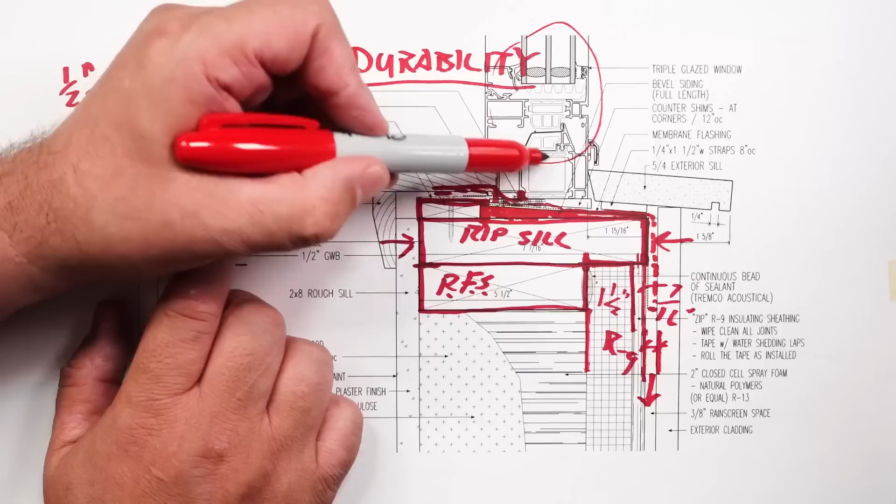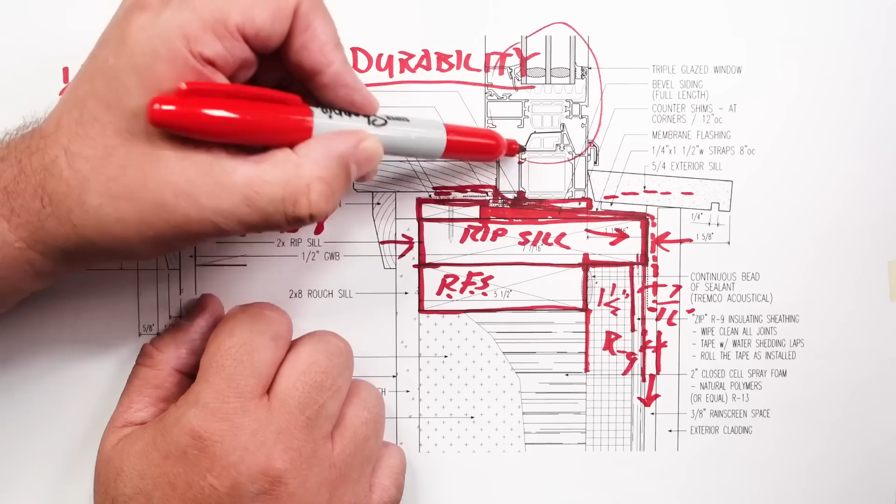All right, so we have our sill pan, and then you remember we have our metal clips. Those get attached to the window there. You can see the window unit here gets set in. On top of that, we have our little reverse blocks. Now it gets a little muddy in there, but the sill, remember, is sloping down. The whole purpose of the reverse block is to put the surface that we're going to place the window on back on a level surface.

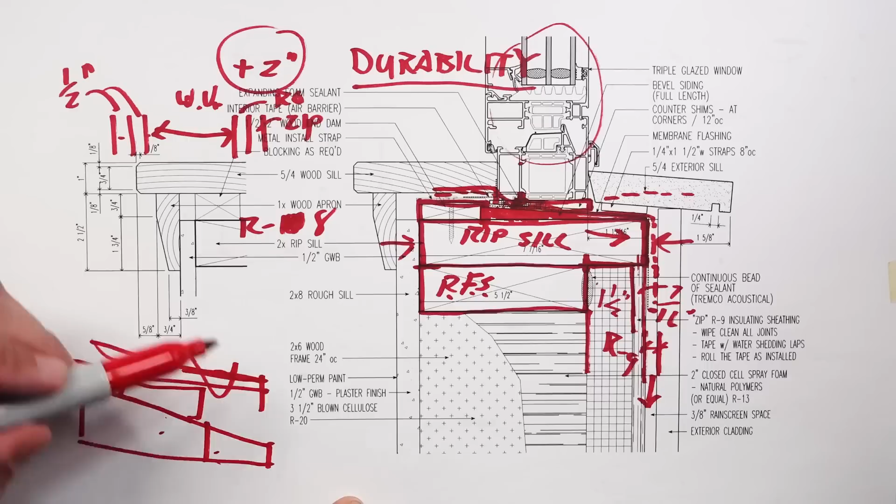So if I take a piece of siding that is sloped, that's not the best piece, man. I'm having a hard time drawing here. So let's take a piece of siding that is sloped, and if I cut off a small chunk and then I reverse it and I put that chunk here, then this plus this inverted is going to give me a nice level playing field, right?

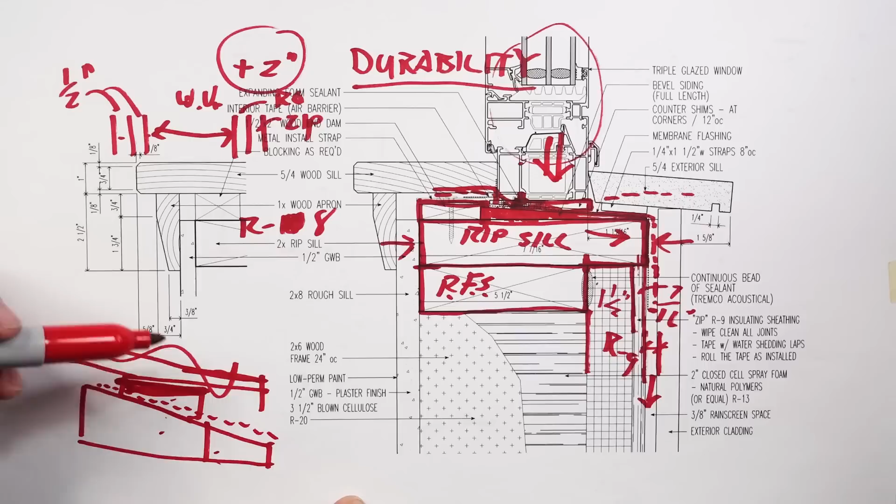And that's going to give me the ability now to set the window down and rest it on something that's level, but it also has this space underneath now that water, should it migrate in on the jambs or wherever, it's going to be able to leak down. Now, one of the important things there is getting that foam or seal as close to that inside edge as we possibly can, within reason.

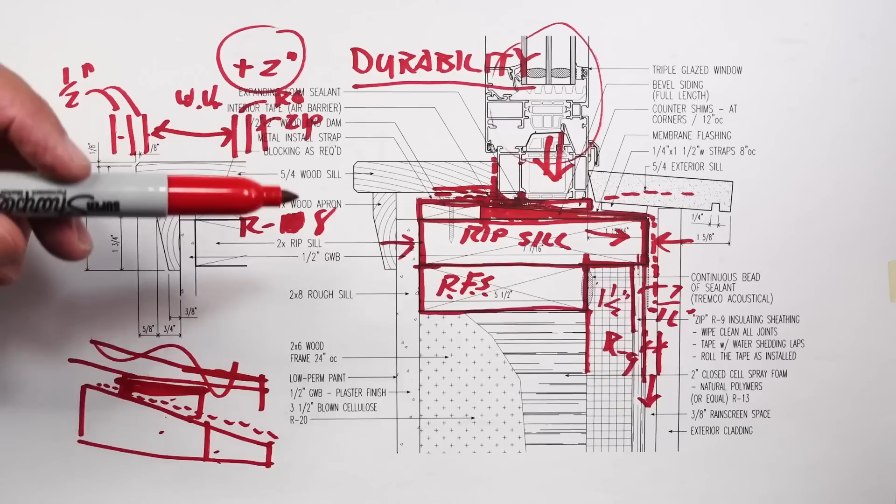And then, of course, you saw the detail where at the end I showed you that we would either put a backer rod and seal it in there, or we would simply tape it off. So either way, it works. It works very effectively. I've been doing a detail similar to this. This is probably the second time using this specific detail with the rip sill.

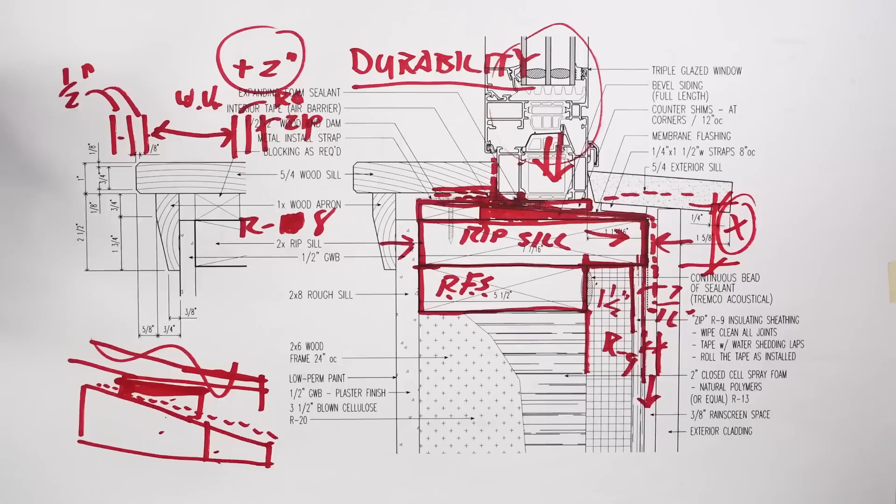I was just getting way too many comments about never having anything out here to nail to. And we have to put our sills in, we have siding and rain screen, a whole bunch of things terminating there, and not having anything to come in there. So anyways, that's a quick overview. Big Red did his job.